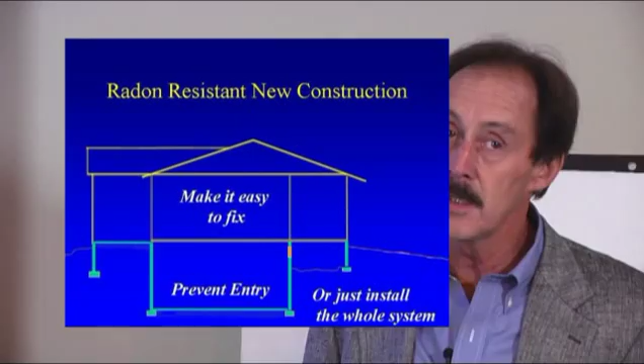So that's what this slide gets to - make it easy to fix. If there's a problem, if we've got a test, make sure you can get a fan in there easily. Do things that'll prevent radon entry - you know what those are, but they're easier to do in new construction. Or just install the whole system, an active system, to start with. But these are things you're going to have to work out with the builder.

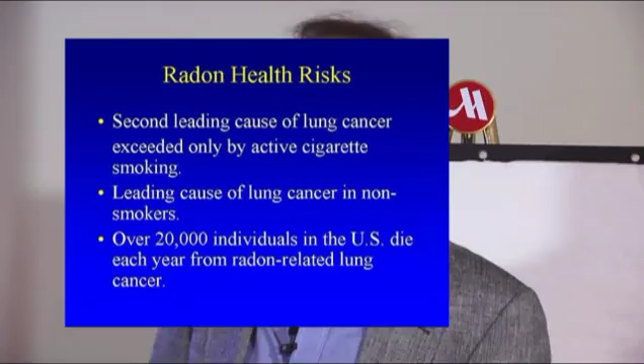I'm not going to go over the health stuff because you all know that story. These two slides only point to the fact that there's current work by the World Health Organization talking about what's the risk of radon. Basically the conclusion is that there is no safe level. You all know what the story is - we work to 4 picocuries because that's what the technology allows us to get houses below when doing mitigations. But the lower you can get those levels, the further you're reducing the risk. So in new construction, you can do that just by paying attention to making a good gravel layer, making sure the slab's sealed.

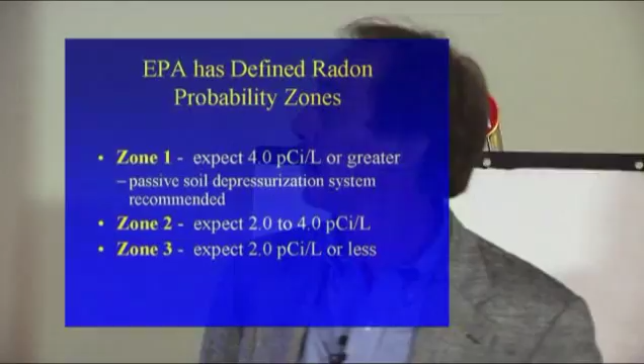All those kinds of things you know about, but we'll go over some of those again. The zones - you know what those are. Please raise your hand if you don't know something that I'm skipping over here, okay?

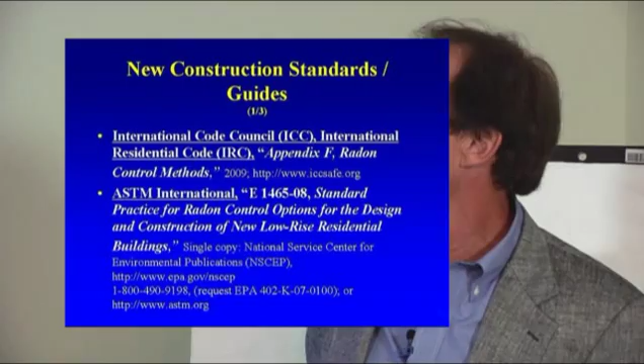That's the United States. All right, here are the standards we're going to work with. I should amend that - we're not going to work with all of them. We're going to work with 2 of them, basically. The first one is the International Residential Code, Appendix F. Let me find my button. There you go. The second one is ASTM International E 1465-08, and that is the standard for putting radon-resistant new construction features in houses.

The 2 documents are quite different, you're going to find that out. One's like, I think, 38 pages - that's this one, 38 pages, tiny type. Appendix F, if you're ever in the building code, that's tiny type too, but that's only 7 pages. So you can kind of see the disparity there in depth.

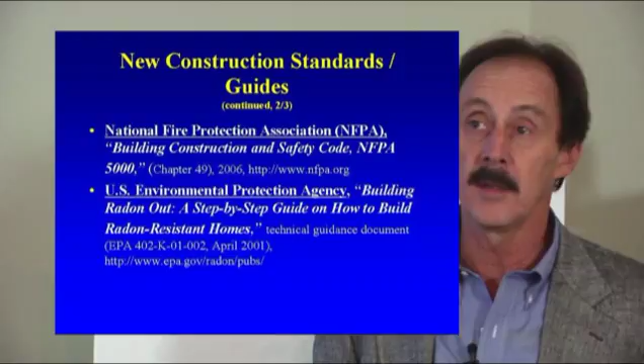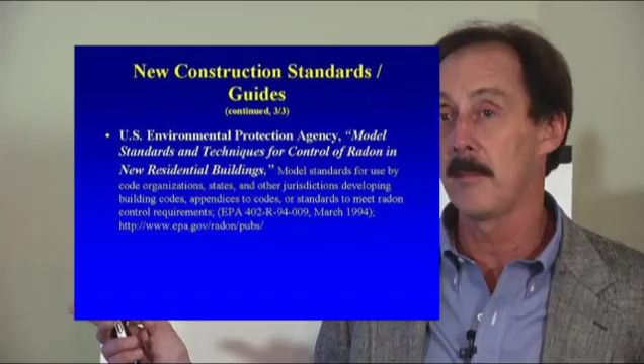The National Fire Protection Association has a standard as well. And EPA has a guidance book we put out years ago called Building Radon Out. The only reason I put it up there - it's not a standard, but it is a wonderful reference document for you to get a hold of. You can go online and get it, and I would advise you to do that. Lastly, something I had to put up even though it's very old - it's the document that me and one of my counterparts developed at EPA years ago in '94, and it's basically the work that these other standards were based upon - our model standards for new construction in homes. It's another good document to get off our website.

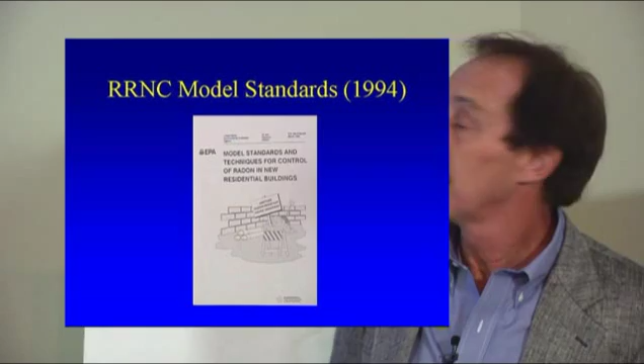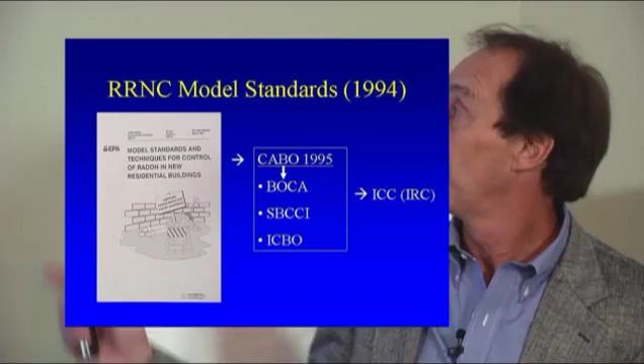That's the model standards I just spoke of. Here's kind of the derivation of these things. From those model standards, we had a CABO standard in 1995, BOCA, SBCCI, and ICBO. All those codes, as you know, were merged into the ICC and then became the IRC.

The other option is to pipe the system with a fan-powered system. The pipe routing is different when you choose this option in 1465. You have a little bit more leeway in how you can run the pipe because it's designed to have a fan on the end of it. As you know, with passive systems - that first option - it really relies on the fact that the pipe in the passive system is internal to the house, and you're relying on the heat of the house to provide buoyancy to pull that radon gas up the pipe and out of the house.

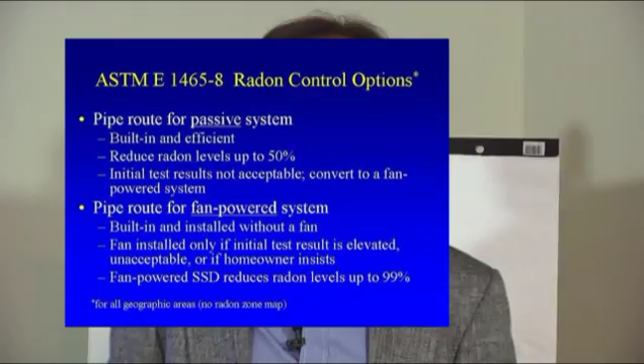With a fan-powered system, the fan's helping you, so you can be more free with how you run the pipe. You've got to negotiate this with the builder, but for my dollar I'd push him in that direction, because I've worked with subcontractors enough over the years and I used to be a general contractor myself. You don't know what people want to do with your pipe. When you're putting in a mitigation system, you know where the pipe's going, you're designing it for your pipe. When a house is being built, you do a stub-up out of the slab and try to get people to do what you want, but sometimes it's not where you wanted it. If you've got a fan pulling on the pipe, you can work around a lot of problems. So that's just one way of looking at it.

ASTM 1465. Here's a key issue between the difference between 1465 and Appendix F of the International Residential Code.

Acceptable radon level is negotiated between the builder and the buyer or client. If there is no client, if it's not a custom home, then the builder's got to make a choice on his or her own about what they want to do.

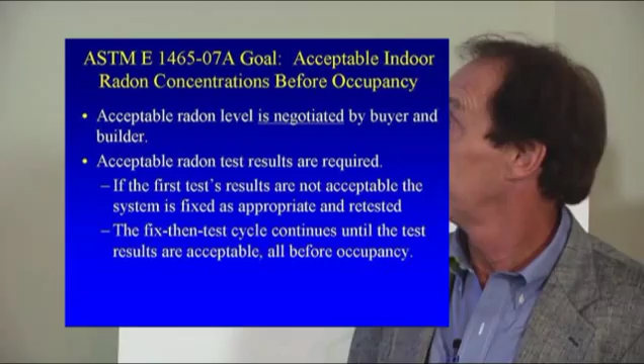Acceptable radon test results are required. If the first tests are not acceptable, you've got to fix it and test again. So 1465 is pretty stringent about that. In Appendix F of the IRC, there is no testing requirement, but you've got testing in this cycle with 1465.

Radon labels. There are five different labeling points in radon systems under 1465. I'll go over the pipe itself - the membrane is labeled, the system itself is labeled, the sump cover is labeled, and then there's some information on a radon service provider that's provided as well.

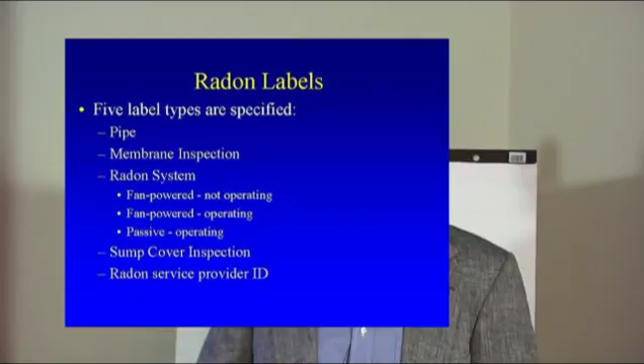Is this just the agenda because it's going pretty fast? Are you going to be going over all those points? Yeah, I'll go over them again. Make sure we have everyone's names up here, and I'll send you my presentation with all these slides, okay?

A quick question - that 50% figure, passive system reduction, is that tested and verified or just a best guess? No, I've got a slide at the very end, remind me and I'll show it to you - NAHB did a study and collected a whole bunch of data for us. Sorry, I didn't repeat the question - he wanted to know how veracious that number is, the 50% reduction. My answer was that NAHB did a study for us, I have a slide on that, and we'll talk about it a little bit later.

Just the outline of the system, pretty simple - starting down here, you've got a gravel base layer. I'm going to go over things more than once because my slide sequence isn't what I want it to be. One thing you'd want to do in new construction, when doing mitigation, is put a T-fitting after you've opened up the slab. In new construction, you're better off running about 10 or 20 feet of perforated pipe to either side off this T - you'll get better suction off the entire slab. Or a loop of pipe tied to this T, which really enhances your ability to draw on that slab. Life's good, compared to fixing an existing house.

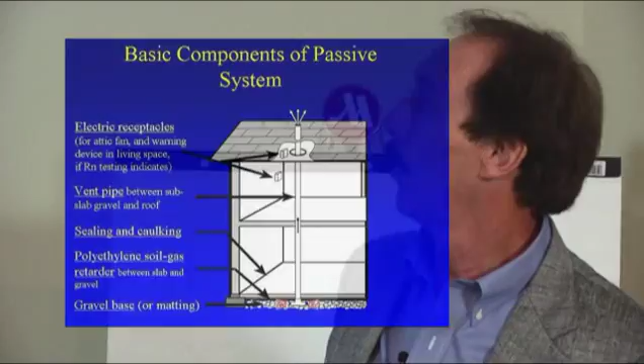Okay, and so we have the vent pipe, and finally we've got electrical receptacles here - one for a gauge or alarm, and one up in the attic. Now, the building code requires what in an attic, as far as electrical is concerned? Has to have a light. Got to have a light in the attic.

So the electrician is already running electricity to the attic. So it's a simple phone call to the electrician, or write it on the plans, or mark it up in the attic once it's framed, put a receptacle, and you tell them where you want it. You know where you want to put the fan, so make it easy on yourself.

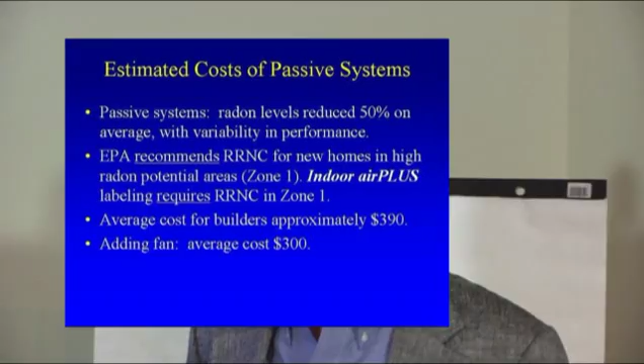Okay, estimated cost of passive systems. Again, the 50% number. It says here, this is a slide I borrowed from someone else's presentation. It's still a pretty good number, $390. Adding a fan, another $300.

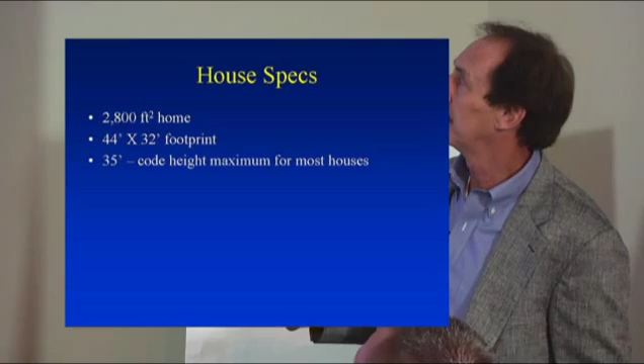Here's some numbers I did 2 years ago. I just sat down one night and started figuring up stuff just to see what my number would be. And I figured it was a 2,800 square foot home, 44 by 32 is the footprint that I just used. I'm figuring a 35 foot, which is code height on maximum most houses. So I figured up my vent stack of 4-inch Schedule 40 pipe. I did not include a labor figure here - that's important to remember. Flashing boot on the roof, a sump basin.

Your standard sump basin, your crock, plastic crock, is about $20. You buy it at Home Depot. You go to the plumbing supplier where I buy my stuff, and you can get one with a gasketed cover, a nice one, for $36. So there's an additional cost there.

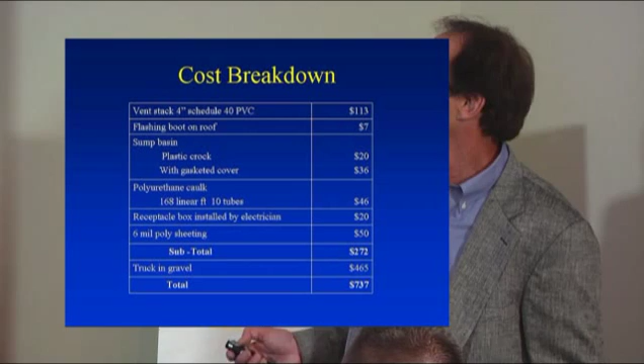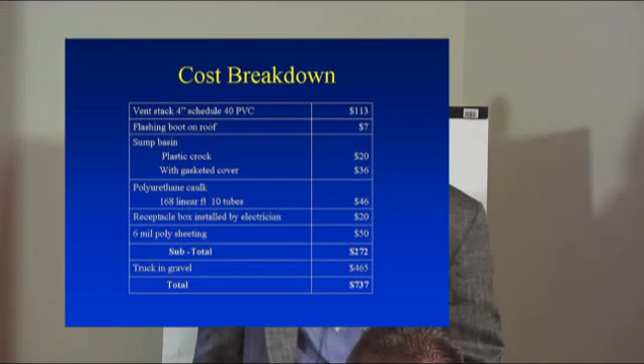Polyurethane caulk to do the 168 linear feet - I figured 10 tubes of that. Receptacle box - I said electrician, he'll probably put a box in for me for another $20. 6 mil poly, so I had $272 in that. So I'm less than that, what was it, 380 figure on the other slide.

And then I figured some areas around the country you can't get washed gravel, or maybe they're not using it for some reason. If you had to truck in gravel for that, where I am in Annapolis, Maryland, this is kind of what we'd pay for 4 inches of gravel to cover that space. So we're up to $737 if we've got to put gravel in. But that's kind of the exception around the country. Most areas of the country, they're putting gravel under slabs.

Code requires it. That's a reference document I mentioned earlier, Building Radon Out. I would highly recommend you get a copy of it.

Okay, here's the comparison. The gentleman in the back to the right with the baseball hat on said, are you going to go over this again? All right, let's go over it again. 1465, 38 pages versus Appendix F, 7 pages.

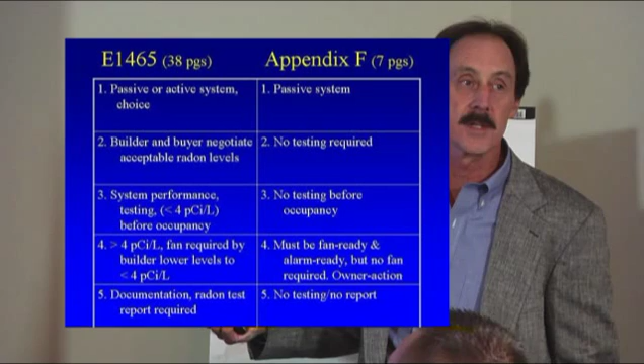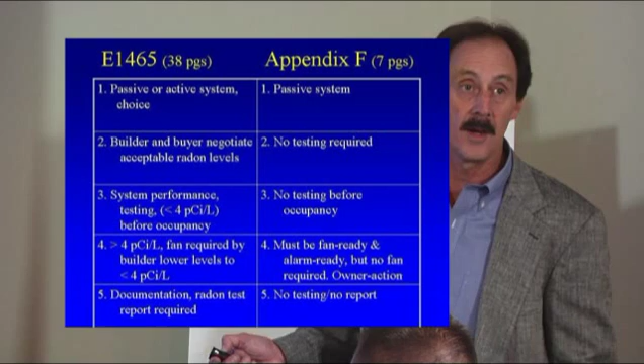1465, you have the choice of a passive or an active system, if you're following that. And Appendix F just calls for the passive system. The builder and the buyer negotiate acceptable radon levels here in 1465. Here's a huge difference - in Appendix F, there is no testing required. You're just putting in a passive system, and we hope for the best.

System performance testing - less than 4 picocuries before occupancy. You've got to have it below 4 or you can't get an occupancy permit. With Appendix F, there is no testing. If it's greater than 4, the fan's required by the builder to lower the levels. And over here in Appendix F, you have to build it to be fan ready and alarm ready. In other words, you have to have the receptacle boxes in both locations, but you don't have to put a fan in.

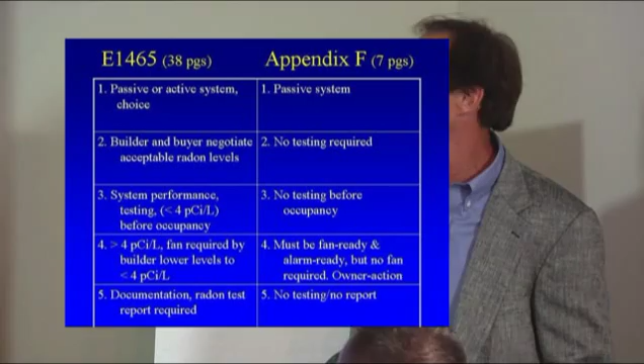Okay, or 1465, you get a radon test and you have to have the documentation. The builder has to provide the results to the homeowner. No testing again with Appendix F.

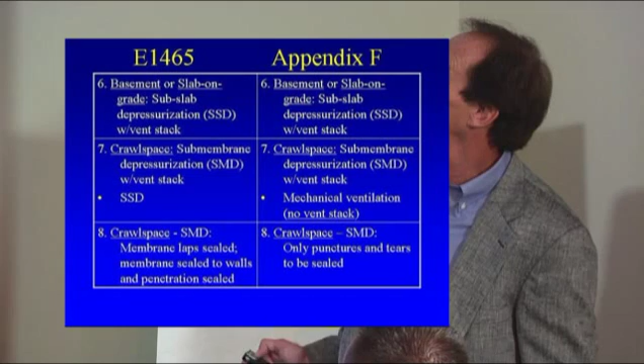1465, basement or slab on grade, sub-slab depressurization with a vent stack. Over here, same, okay? Crawl spaces are a little different. Submembrane depressurization in 1465 with a vent stack, and sub-slab depressurization, meaning you can pour a concrete rat slab. Everybody know what a rat slab is? Over top of the polyethylene. You have two options there.

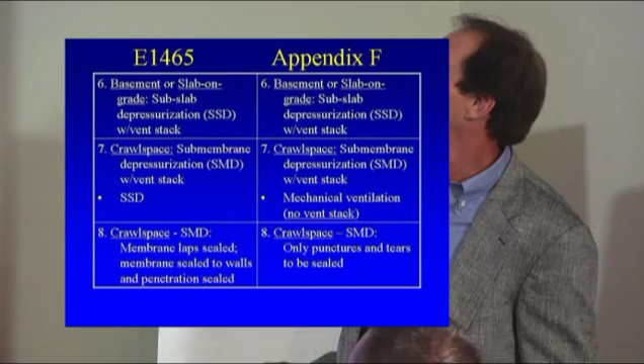In the Appendix F, you can do the submembrane stuff, but they also allow mechanical ventilation of the crawl space with no vent stack. Now, someone tell me what issues that may raise if you... Tremendous amount of moisture coming in. Where's it coming in from? Outdoor air comes in, hits the cool down below, and condenses out. Okay. Cold air in the winter.

How about radon? How much? Now we're not testing - remember over here, we're not testing. Okay, we're ventilating the crawl space over here, but we're not testing. So we don't know what the radon levels are either, do we? In the back there, green shirt.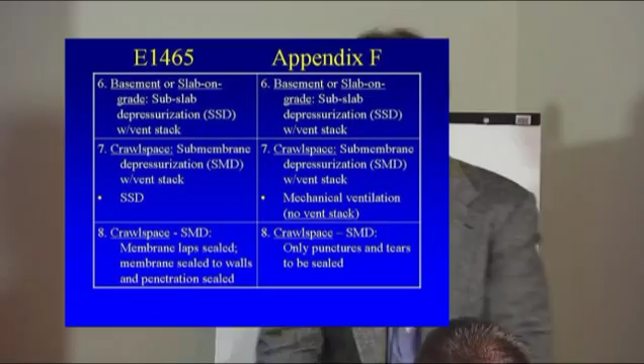There's an interesting anomaly here. What Appendix F allows you to do, which I think is problematic, is it allows you to put mechanical equipment in the crawl space. You can ventilate it like this, but you can also put equipment in, and the requirement is that the equipment has to be sealed, including the ductwork. Have you ever tried to seal ductwork and get it really, really tight?

It's hard to do. The air handler cabinets are really hard to get tight because if you start running caulk all around them, you void the warranty with some manufacturers. You just can't take your mastic and paint the whole cabinet and make it airtight. So if I was involved in that, I'd be building myself a conditioned crawl space if the builder was doing it, and I would put in sealed combustion furnaces using outside air for the combustion. So it allows you to do it, but let's remember what we're trying to do here.

You're trying to provide a service to a builder, and if I'm the builder, I want it turnkey. I don't want to get a phone call when little Johnny goes to his sixth grade class, comes home with a radon test kit, and then my house ends up having high radon levels. I want the system to work. So I would be advising the builder against doing that.

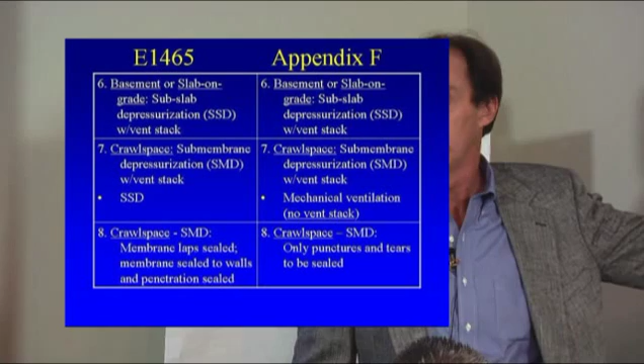We can do a lot better by using a vent stack and a membrane in the crawl space. Here with 1465, we have the membrane laps. Membranes are lapped and they're sealed, glued or taped. Also when it comes to crawl spaces, they have to be glued and affixed to the wall. You have to use a ramset gun or something with furring strips to get it tight to the wall and make it stay there. Over here in Appendix F, you don't have to do that. You just lay the poly down and lap it, you don't have to seal it.

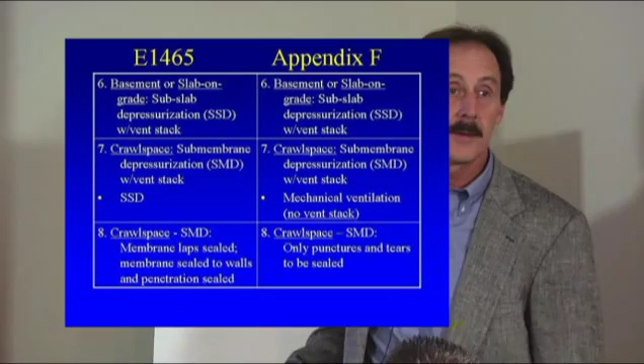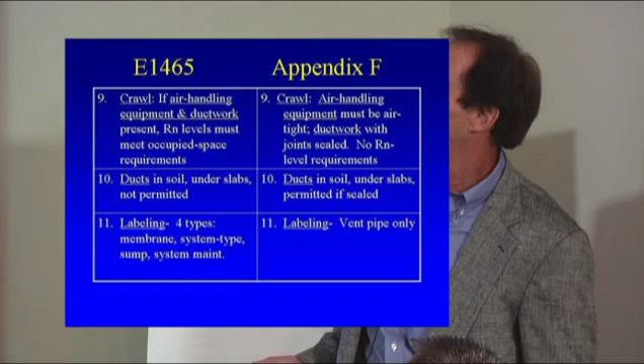A few more things, I already went over that: air handling equipment, tight ductwork if you do it with Appendix F. There's another interesting thing: ducts in the soil are not allowed under 1465. We all know why we don't want to do that, right? You mine radon, you get a leaky duct, radon leaks into the ductwork, and there you go.

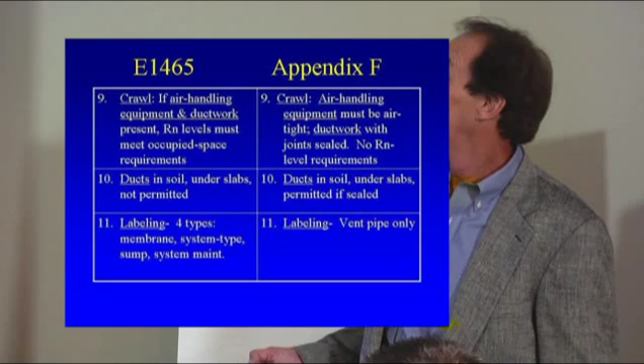In Appendix F, they allow ducts in the soil if the ducts are sealed and the system is positively pressurized. Now, does that mean you have to run the system 24 hours a day, or am I missing something? Maybe the return ductwork is above the grade. The other thing is it doesn't really matter—if it's not running and you have leaks, it'll permeate the system. So I don't see that as much of a very good option.

Could they mean that supply ducts can be in a slab but not return ducts? It doesn't say. But we found when we were doing some of our early research 15 to 18 years ago that we were getting radon in the houses through supply ducts. We had a builder in—where was that—Minnesota, a very well-known builder whose name I won't mention. They were putting radon systems in the house, stubbing up pipe under the slab, and then running all the supply ducts under the slab.

So wait a second, guy, what are you thinking here? But anyway, this is just a little part of the discussion I always bring in because I hate pouring concrete. I have the worst moments of my life have been pouring concrete. This is where these guys live, and I hate this place.

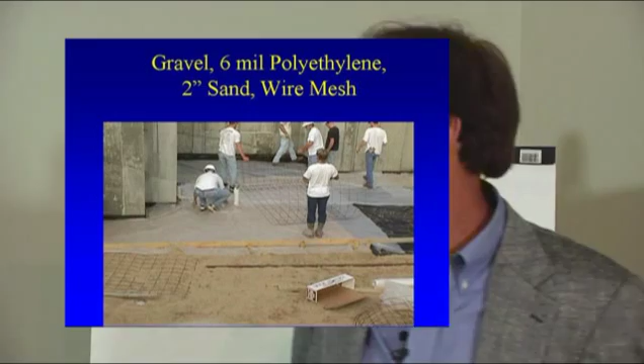This is the actual day they're pouring this slab at a school over in Maryland, and these guys are hustling to get the insulation, the 2 inches of sand under that rebar and wire before they pour. It was supposed to have been done Friday, and it's Monday, and we're pouring, and they're not done yet. So I feel great about that because that always happened to me, and no matter how hard I worked to get everything on site ready to go, it was never ready.

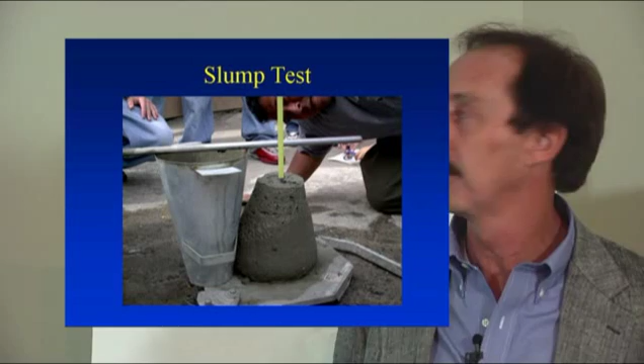I just threw these in. Everybody ever seen a slump? Know what a slump test is for concrete? That's what's happening right here. They've turned it over and they're looking at the slump. These are, of course, they're going to pour different truckload samples in there to make sure they're getting the proper mix. Our inspector guy knows all about that, I'm sure.

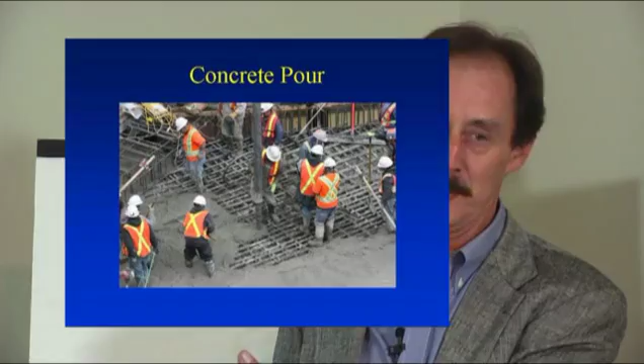I throw this slide in there because this never happens, or maybe if you've got a big builder and he's pouring like 10 foundations in one day. But smaller jobs, you never have enough help, you never have teams of people helping you. There's 3 guys, and then one of your forms breaks or the truck gets stuck, and it's just a nightmare.

And where I'm living, we pay 10 yards of concrete in one truck is $1,300, and the guys usually will stay on site for an hour, and then every minute after that you start paying for it. For an hour? Yeah, no, that's from the plant. Oh, okay, from the plant. Yeah. So if you've got this team of guys, life is good, but usually that doesn't happen. Look at them, they're everywhere.

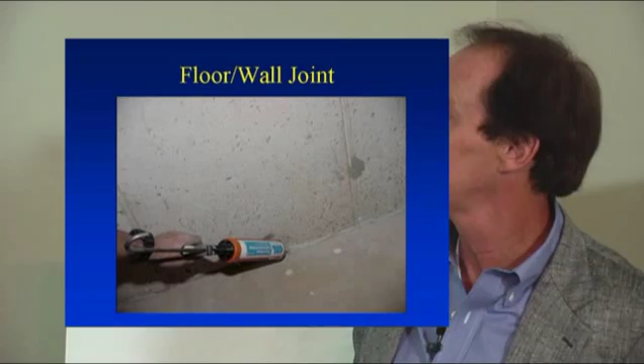All right, I put this slide in here just because this is a joint. Now you don't see this a lot in houses, but you've got an interior wall here. It'd been really nice if they'd have used this or this, so they'd have a nice clean joint to caulk here. Just trying to show that same thing.

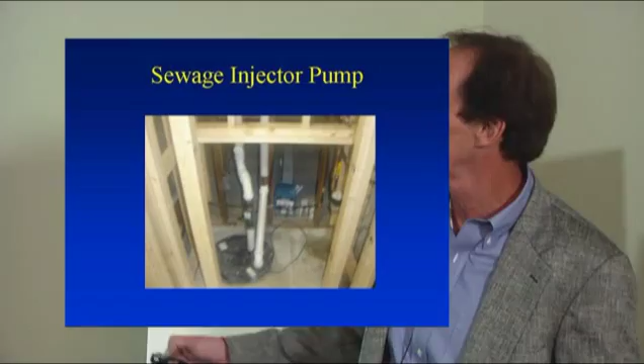This is not a radon pit. What is that, you think? There you go, say it loud so the camera guy can hear it. Sewage injector pump. Okay, but the same rules apply that we have to use on sump covers. We've got to seal around this edge so we don't have leaks here. And then these are nicely gasketed. They're kind of filthy, but then you want to use this thing again to get a nice edge around the perimeter of this cover.

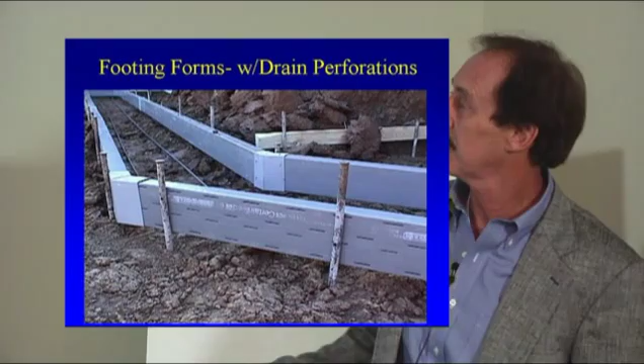Have anybody seen the Form-A-Drain product? Anybody use that? It's a CertainTeed product. Instead of building wood forms or digging your footings in the soil, you put this stuff up, and it has the drainage capacity right built in. This is the drain tile. The thing I would caution you about, I mean it's a great product.

Who has an opinion on connecting outside drains and inside drains, foundation drains? Yes, sir, in the back. Yes, in the green shirt? Never? Okay, so that's one of the messages you got to tell your builder and talk to your code guy. Do you agree with that? I agree with it, yeah. So they're kind of good at this, telling you how you can connect everything, and this is a one-stop shopping, you can connect everything to this. Nah, don't do it. Keep your radon system and your foundation drainage system separate.

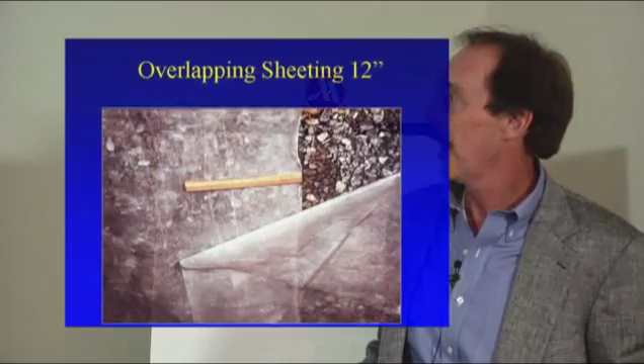These are just some of the things to stay away from when you're putting slabs in houses.

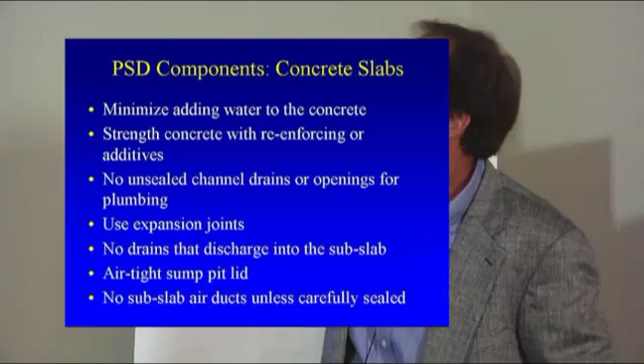How many people hear builders whining about concrete and membranes? They like to punch holes in the membrane so it cures. Yeah, who else hears that? They do it. Yeah, oh, they do it, they definitely do it. Yeah. It's a bunch of malarkey, okay? So you need to talk to the builder about that, and I can send you information from the American Concrete Institute and from the Portland Cement Association. I've talked to all their engineers.

A couple things you can do. They're saying, well, if we don't put holes in the membrane, then the slab's gonna curl. Well, first off, they're not curing the slab properly. They're supposed to cover the slab with burlap or something so it doesn't lose all the moisture from the top side. It's going to dry faster on the top than it does in the bottom. But why don't they cover it? Time and materials, too much trouble. The finisher has to stay there another hour or two to trowel it one more time, or just wait till he can trowel it. It's going to take longer.

The other thing the experts tell you is you don't see slab curl in houses. The slabs are too small. It's almost like an old wives' tale. When you're pouring a warehouse concrete slab and you've got control joints everywhere and you're covering something that you can build automobiles in, like a plant for GM or something, you see slab curl. And it's an issue because you're going to be driving forklifts on it and that kind of thing. In houses, they're tiny, you don't get slab curl in these small slabs.